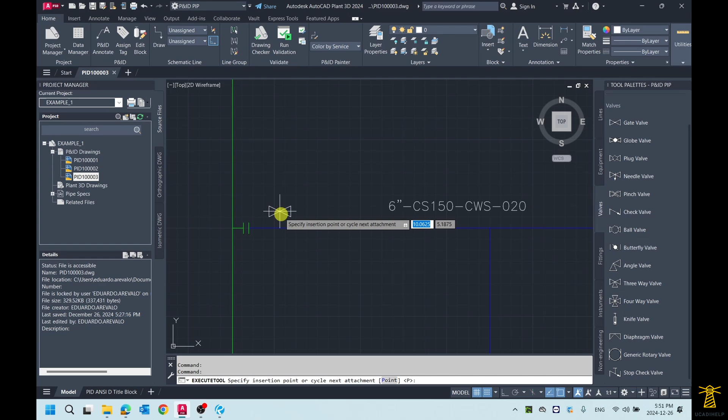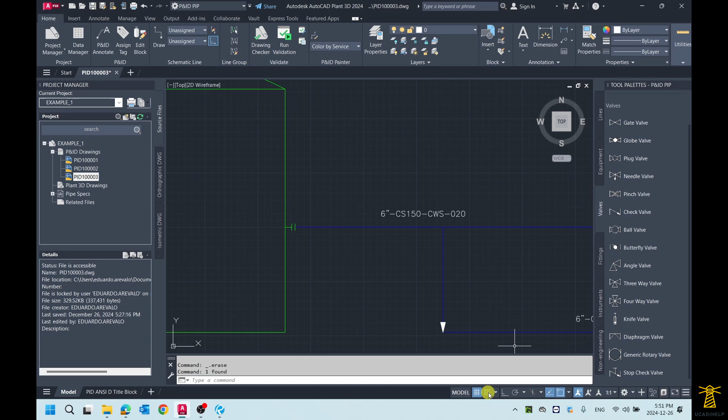Let's add some gates. It's as simple as dragging and dropping. See, this is the snap that I was telling you about, it's more organized. Sometimes when you don't have the snap activated, I'll show you what happens - you're trying to place a valve quickly here, and it's not actually on the line. So it's important to have the snap activated. I do prefer to have the snap to grid activated, so it's cleaner that way, and it's easier also to connect elements.

So let's add gate valves, one here. As you can see right away, the valve is giving me the size, and this is because the line that I inserted already has 6 inches as diameter. So the valve is taking the same diameter to be the diameter of the valve.

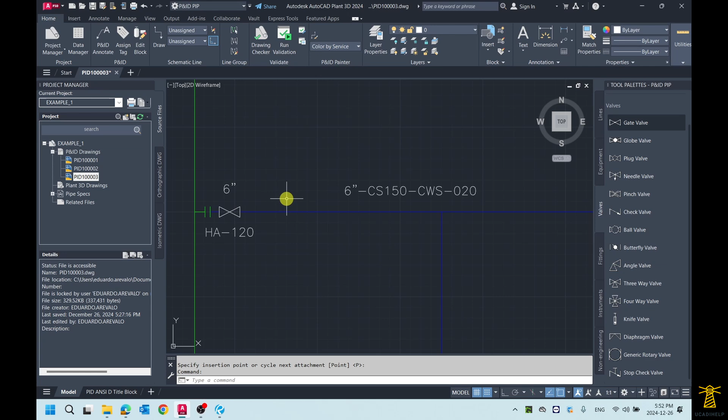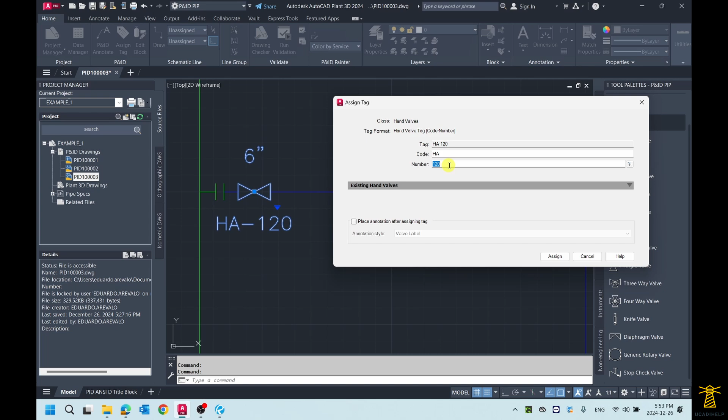Another gate here. And as you can see also, the tag number has been populated automatically. You are always free to come to the valve, right click and click assign tag, so you can add your own number. In this case it's already given automatically, so you don't have to worry. This is also customizable - you can change this through your project administrator in the project setup.

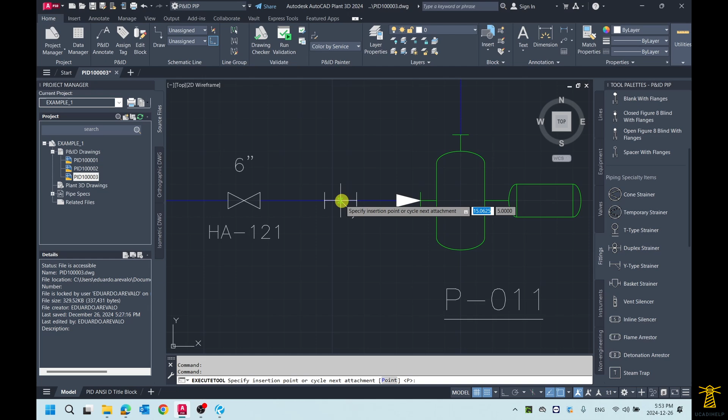Let's add one strainer. Let's look for strainers. I believe the strainers are in fittings. So click on the fittings tab, and you're going to find Y strainer. One strainer for this pump. This is good.

And we're going to repeat the process for the other pump. Add a gate valve here, and add a strainer here. Perfect.

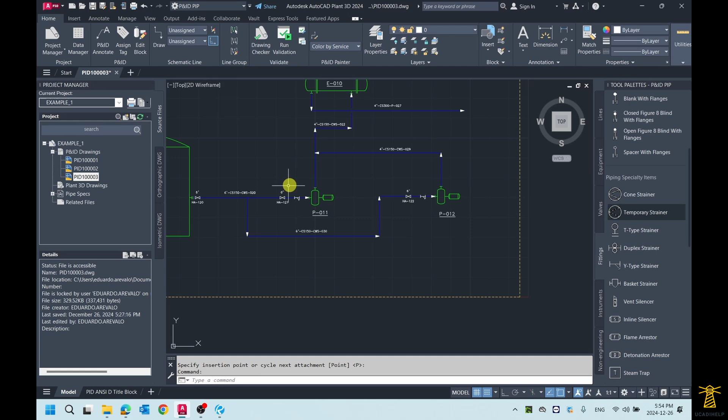Very good, so you have already your valves. Now we're going to add valves to the discharge, heat exchanger again - valves. We're going to add a check valve.

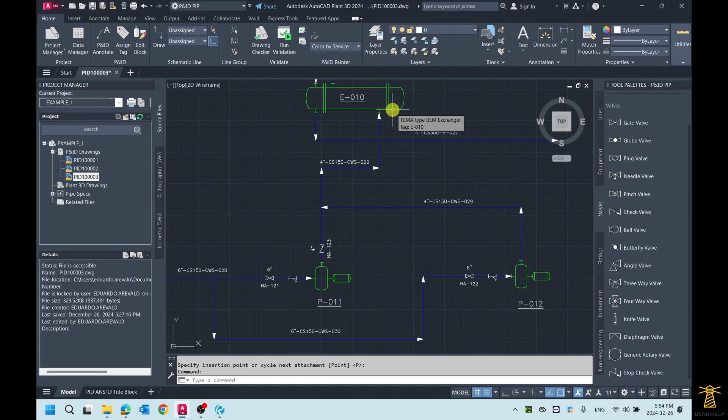I want you to also pay attention to something here. This line has a direction. As you can see, you have arrows at the end of the polyline, indicating that this is discharge because it's going from the pump to the heat exchanger. This is the reason why also the check valve is pointing in the right direction - the arrow is pointing towards the sense of the flow.

I'm going to show you after how you can reverse the flow in the line. It's very easy, but let's first finish with the valves. Another check valve here, and another gate.

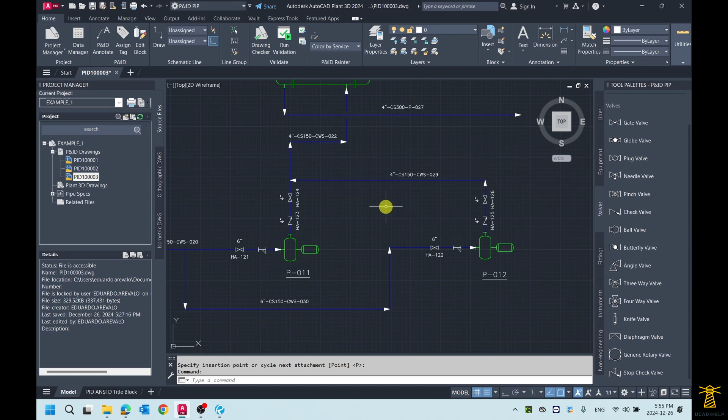At the entrance of the heat exchanger, we're going to add a ball valve this way, and this way. Very good. As well at this connection too.

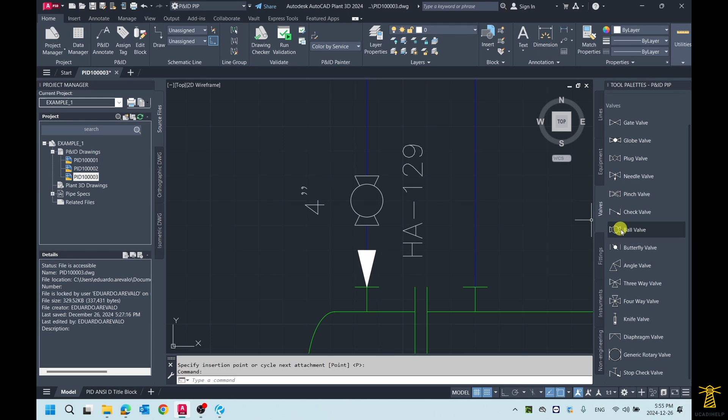I'm going to offset the valve a little bit so they don't cross each other. We're going to do the same for this pump, a gate and a strainer.

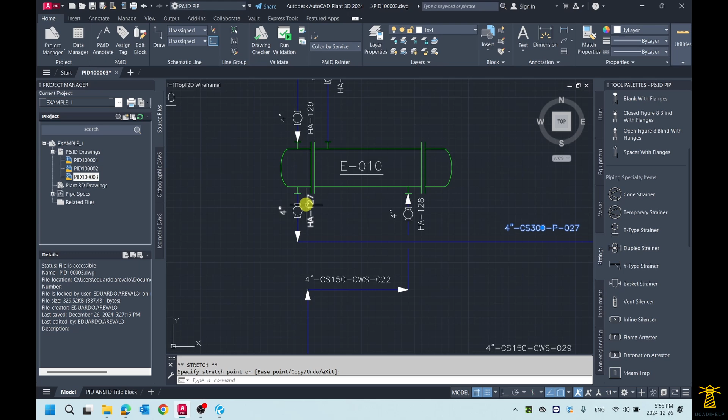And we forgot to draw the bypass. We do have a bypass for the exit of the fluid process. So we are going to be drawing a bypass here.

When we were doing this connection, if I start my line from this line, it's going to assume that it's a continuation of line P027. I could do that, but I'm going to show you a little trick I do sometimes to avoid that - because if I start drawing like this, then it's going to understand that everything is aligned. But I don't want that, so press Ctrl Z, and you are going to draw your bypass like this, not connected.

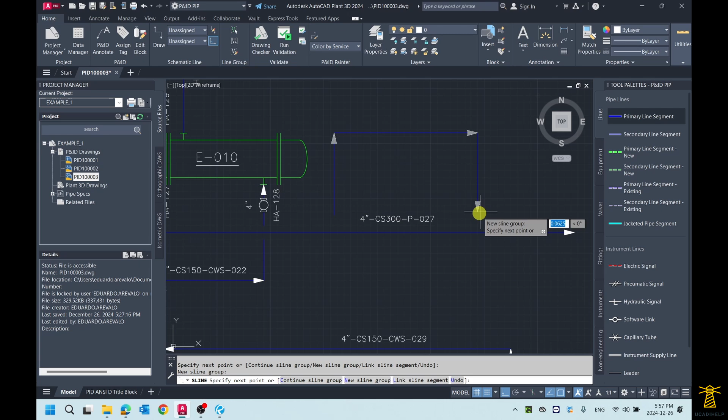And then right click, enter, and after that you are going to connect it afterwards. So hit on the end and connect it. Connect the line, same thing for this one.

Perfect. Always make sure that your orthogonal mode is activated. This is also important - if you don't have this, then you're free to draw diagonal lines and other types of lines, but not perpendicular. So make sure that you work in orthogonal.

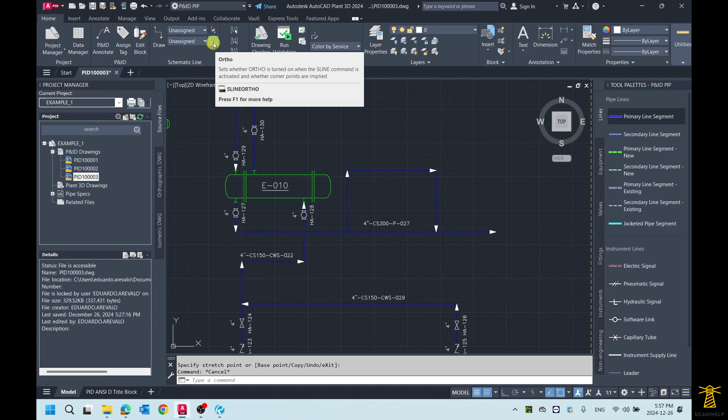Then we're going to add 2 gates, normally closed. One here and one here. As you can see, because we haven't defined the line, then we don't have a diameter right now - this is completely normal.

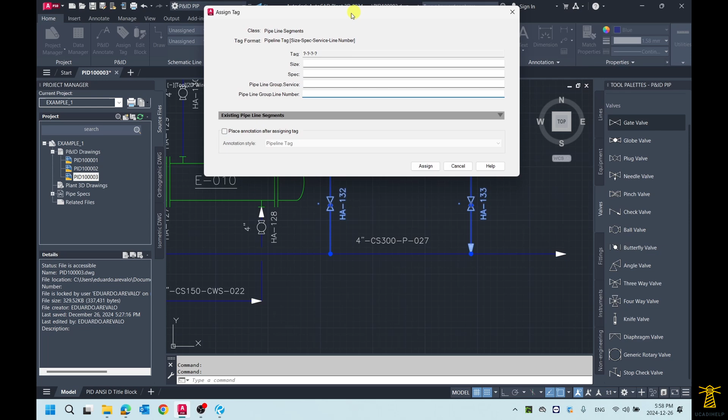Let's take a next number here to assign our line, to assign a tag to our line. So assign tag - we're going to go with 4 inches. Also, it's going to be a bypass. We're going to add a valve in case the other valve needs to be maintained. Spec is going to be 300. Service.

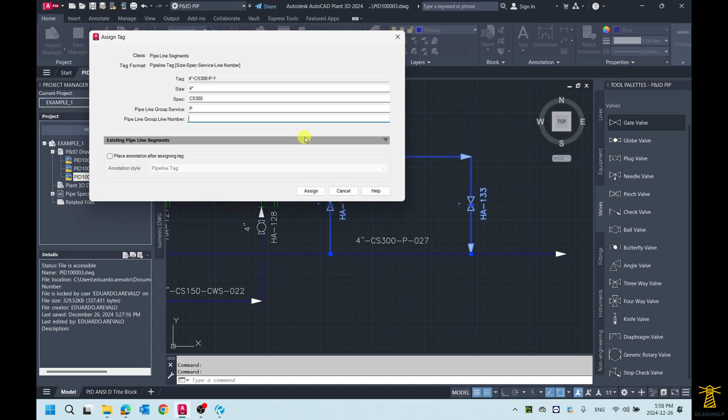If I press P, like I said, you're going to have right away highlighted the one that you want to choose, so this one. And here you're going to go with the number, I think it's 20, I think it's 29. Let's see.

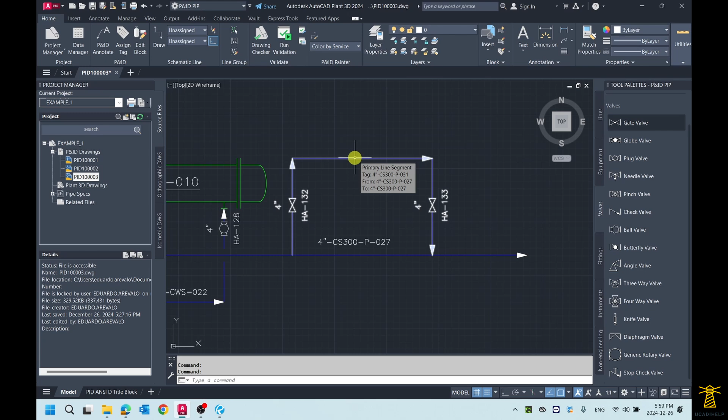It's already there, so I can't. I think actually it's 31, so let's go with 31. Perfect, see now diameter is shown, meaning that the line has already been tagged. If you hover over your line, you're going to see the full definition, the full description, tag 4 inches, CS300, P031, from this line going to the same line. So that's good.

Now we're going to add a control valve. To add a control valve, you have to stay in the same tab and scroll up and find the control valve, and you're going to place one here.

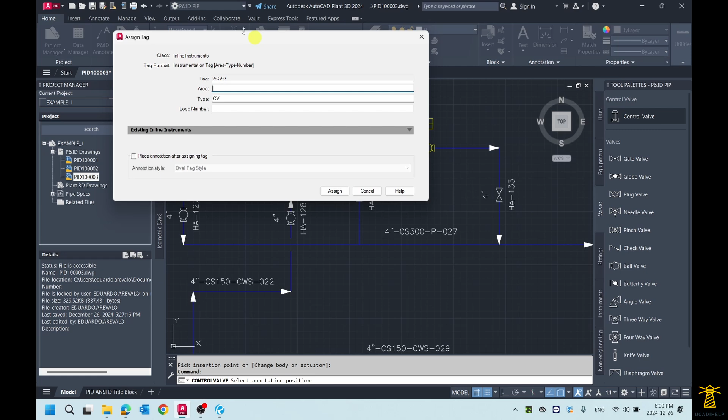As you can see, by default, the annotation is going to prompt right away where you want to place your annotation. So in this case, we're going to hit around here, and we're going to name this area 100. We are still under 100.

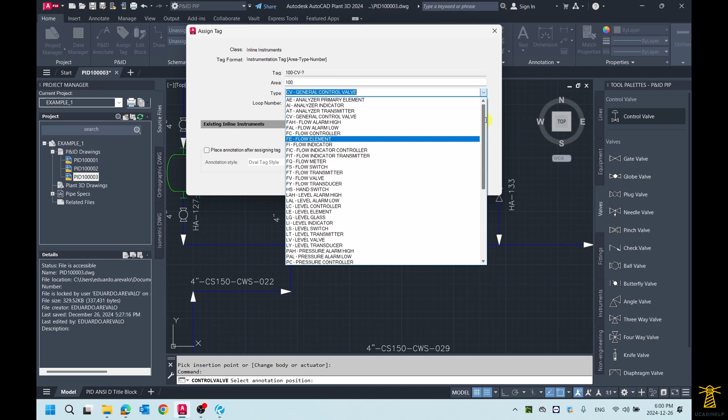CV, that's the type. Again, you have the whole database here, you can choose whatever instrument you want. Usually when you have one type of element created, it's going to take whatever is set by default by your project administrator. So we're going to leave it as CV, loop number this is going to be 002, and I'm going to hit assign.

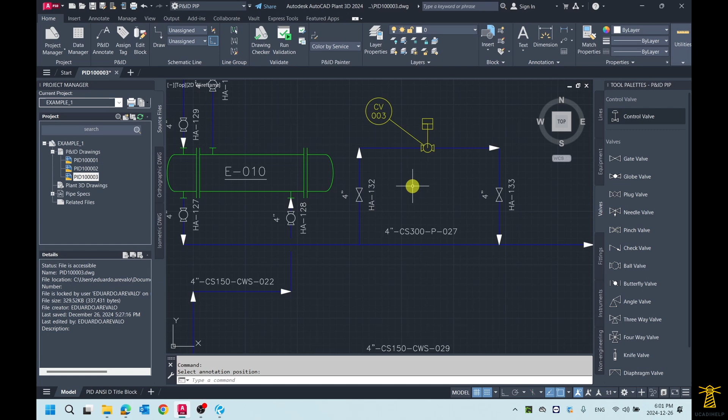This already exists because I have already 2 P&ID drawings, so I'm going to set this to 003. I think I have 002 already. Perfect, 003. And I am going to add another control valve.

So let me take this annotation and move it, shift it a little bit, and hit control valve again. We're going to place the second control valve here, and we're going to name this 004.

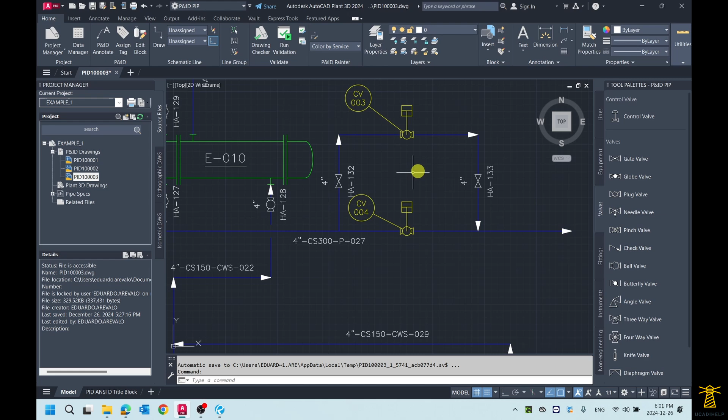Excellent. Now, these two gate valves are normally closed. There are a few options that you have when you enter some instruments, or in this case, valves. If you come here and right click, you can look for the option normally close.

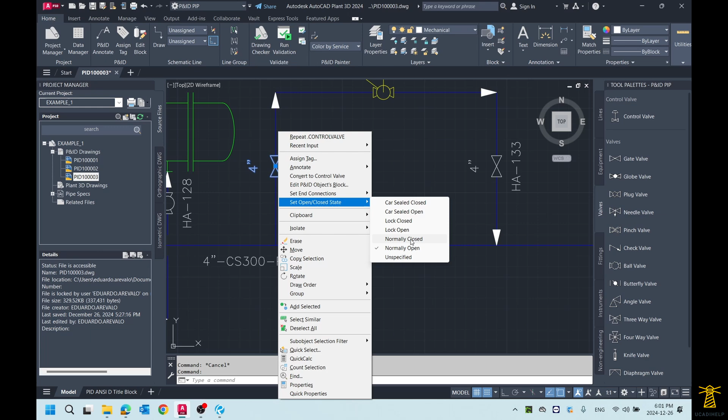So the beauty with this, also with this type of blocks, is they allow you for substitutions. Say, for example, now we don't need gate valves anymore, we need ball valves. The only thing that you have to do is to come to this little arrow here and click and look for the valve that you want to replace. In this case, if it's a valve, you just need to locate the valve and replace it.

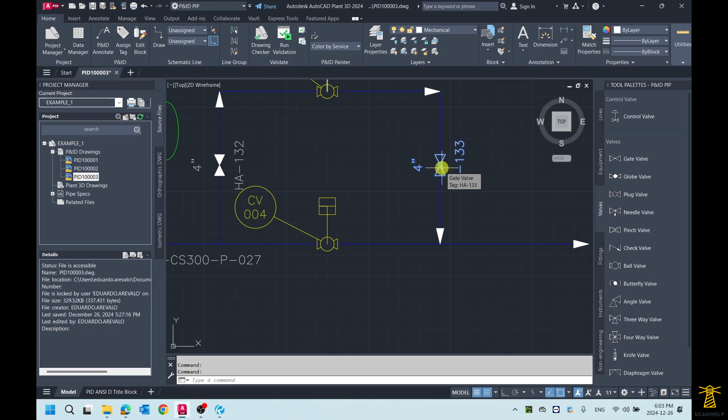So we're going to leave it as gate valve, and we're going to set it at normally close. Right click, you can also choose the type of connections you want. We're going to leave it as unspecified and select normally close.

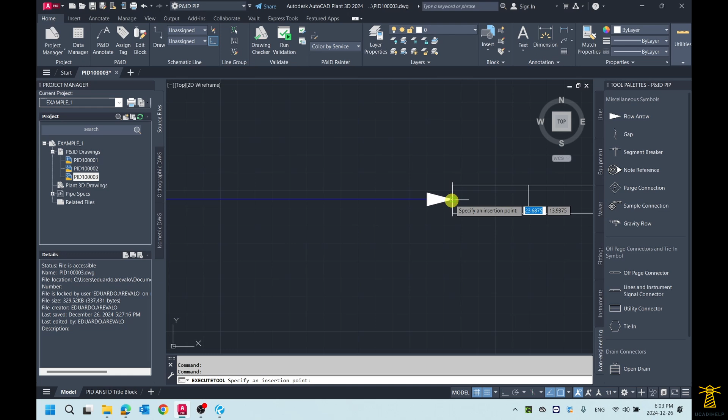This is good. And finally, we're going to add some off-page connectors here. You're going to click on the non-engineering tab and find off-page connector or OPC connectors. In this case, it works the endpoint. I do prefer, like I said, to always use the node, but in this case, I think it works.

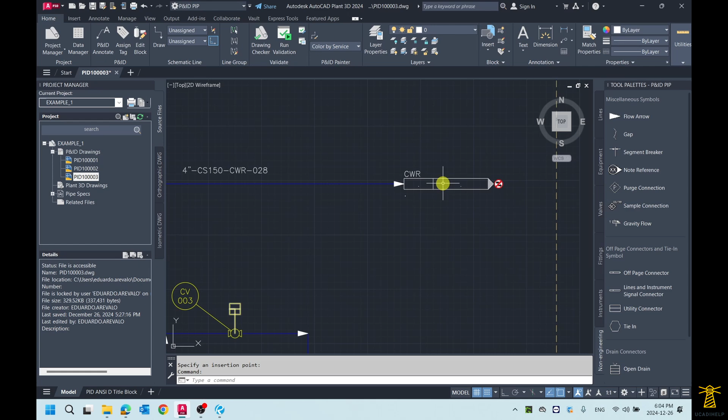So see, for example, when I insert the off-page connector, the property cooling water return from the service of the line was populated in the connector. So that's an indication that the off-page connector is properly connected.

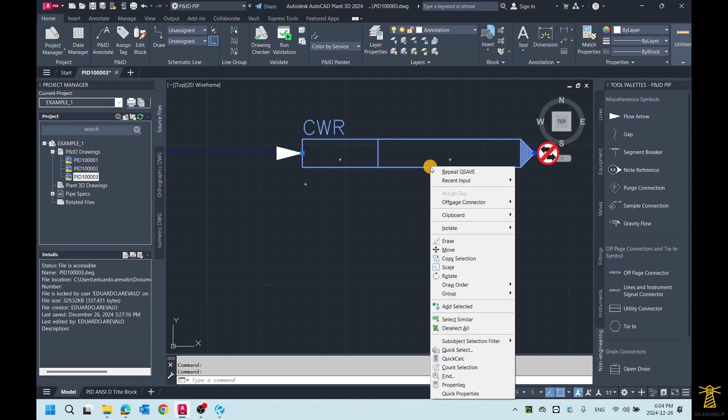So now the second one, perfect. So we're going to now enter some information, additional information to the OPC. We're going to right click, and then we're going to hit properties.

For now, we have 3 data fields that we can add. Again, this is customizable, you can customize data fields that you want to use. So right now they're going to another P&ID. I'm going to fill this one, and the other one I'm going to leave it for the next section.

So origin and destination, this one is going to another tank. So I'm going to put TK0, say for example 15. Connector number, we're going to put 2. Connector number, this one says 600.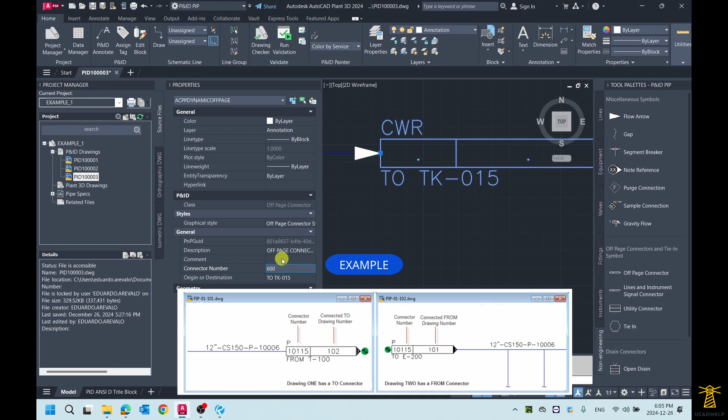The property that we are looking for, the interesting one here, is this one. So I'm going to show you after how to connect that one.

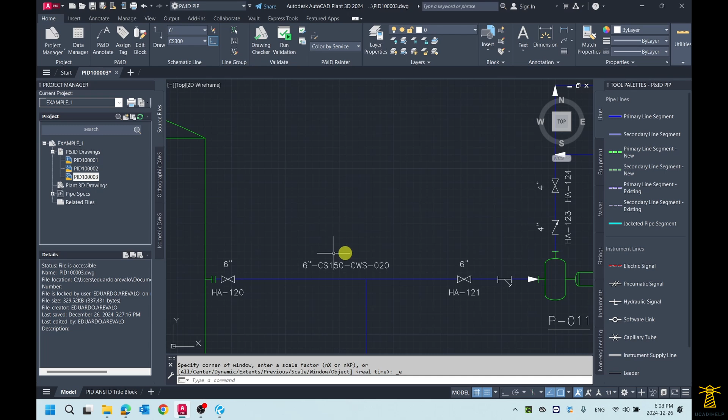Another interesting function I wanted to show you is, for example, when you have a lot of services, in this case we have 2, we have the cooling water supply, and we have the process service as well. There is a way to distinguish the service with this option in the P&ID painter.

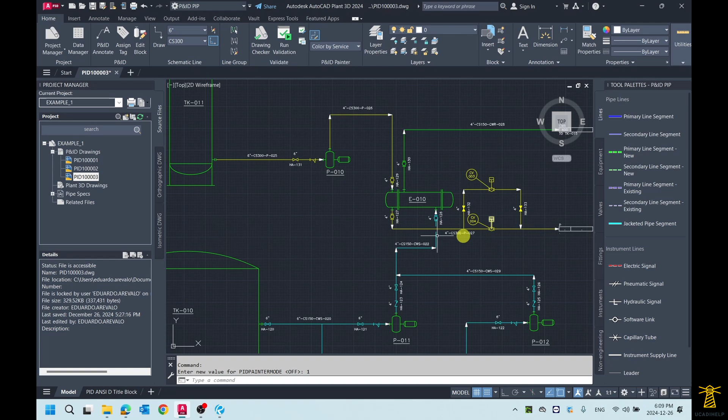Basically, the way it works is that you click here, and as you can see, the lines change color to indicate, to differentiate the services. So the cooling water supply is now tinted blue or light blue or cyan, the process is tinted yellow, and the cooling water return is tinted green.

There are other options where you can also add different types of painters, so you can differentiate your system or your P&ID by diameters or by specifications. That's very easy to set through the project setup. But I wanted to show you that this is an interesting option for you to analyze three different processes so we can see right away the way they are.